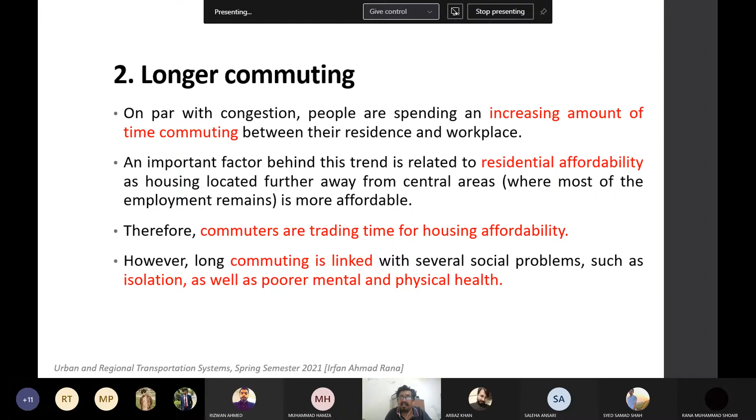But this commuting over large distances or time is problematic because of some problems, especially mental health and physical health issues that it causes.

As we discussed in the previous slides, you can see that average length of work trips has increased, and travel time has increased significantly, but average speeds have remained more or less the same. Commuting time also depends on the country, so this is another problem: longer commuting times.

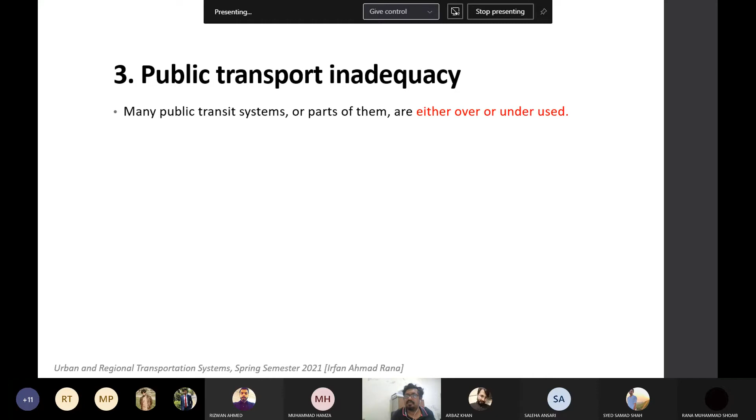Another very valid problem is inadequacy of public transportation. It's inadequate, it's not comfortable, so most of the time public transportation is overused or underused. That poses a problem itself, because in crowded settings it creates discomfort, and people will not opt to travel by public transportation, so the convenience of public transport decreases.

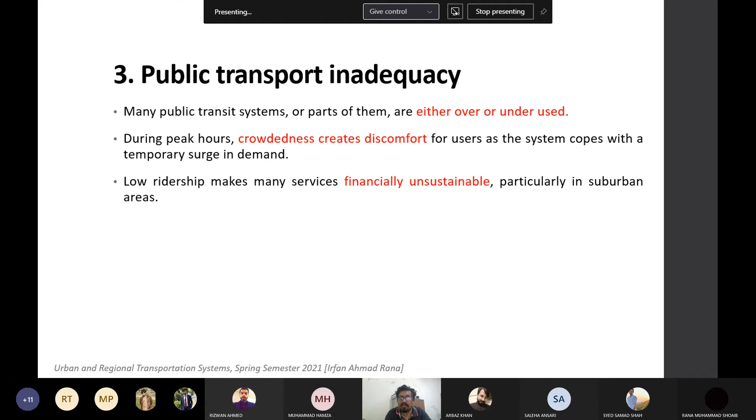People will say there's so much congestion, let's not use public transport, and sometimes due to low ridership, it becomes financially unsustainable. There has been a debate about how much public transportation should be subsidized by the country, or how it should be financed, maybe through tolls and taxes from cars, giving that to public transportation. So that has remained an issue as well.

This is especially an issue when your public transportation authority is different, your local development authority is different, your transportation department is different, and your provincial or national level, district level transportation authority is different. That also poses a problem in operation of public transportation, in how you cross-finance it.

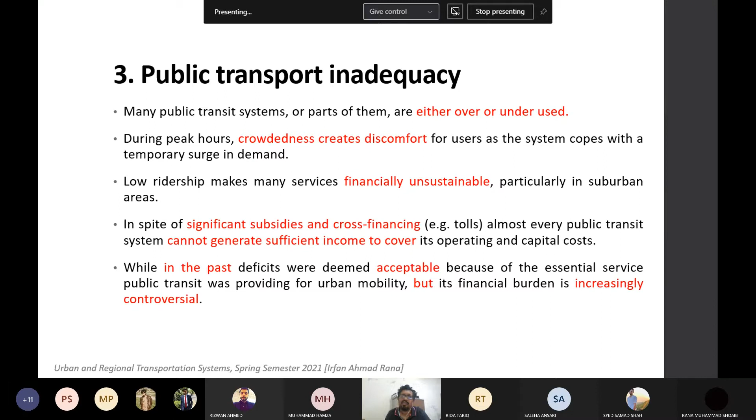In the past it was acceptable that the government would subsidize public transportation, but due to the changing economic structure in the world, it has become controversial whether public transportation should be subsidized by the government or not. So public transport inadequacy is right there.

Everyone knows that most of the cities in Pakistan, at least, are not pedestrian friendly. That also poses a problem for people who are encouraged to use bicycles and walking modes, so we need to emphasize this non-motorized form of transportation as well.

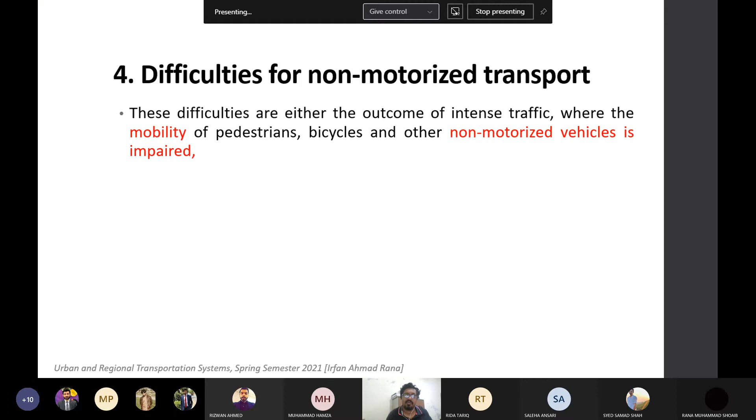Different cities in the world have prioritized non-motorized transportation modes. Then there's the issue that you are using a lot of road, using a lot of public land that might have been converted into public spaces. In Pakistan, we don't have so much public space, so that is another issue: good infrastructure and open spaces are being encroached upon by the transportation system, whether it's green space or area being developed for road infrastructure.

Then there is another issue, that in pedestrianized areas, if they prioritize non-motorized transportation systems, those kinds of systems would also promote a sense of community. Let me talk about the European context, where their old areas, or sometimes public squares, are fully pedestrianized, and they have become places for social gatherings, where people stay a lot, go for picnics or enjoyment.

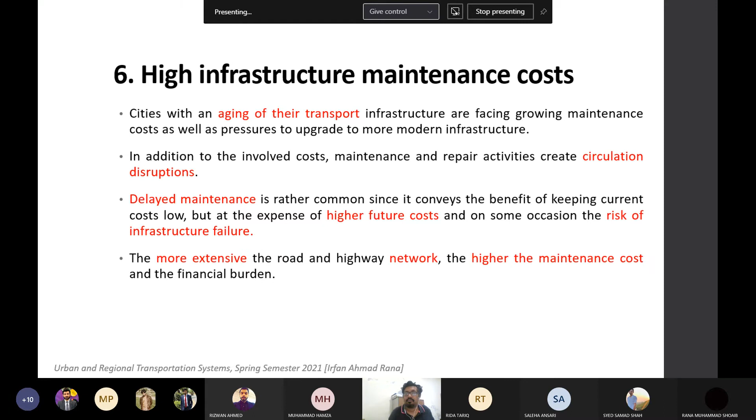Delayed maintenance would also be very bad, because it will damage your cars and limit your mobility as well. So again, maintenance, road maintenance.

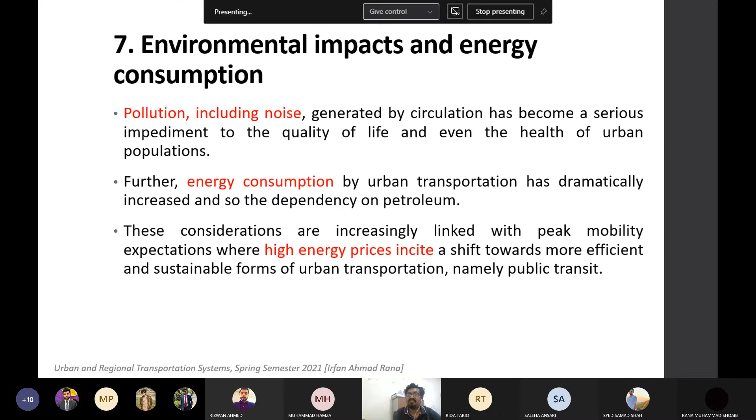Another issue is environmental impacts and energy consumption - how much cars contribute towards pollution, including noise. More cars on the road means more pollution. Of course, congestion and energy consumption are also highly correlated, and high energy prices will again have an effect on your transportation systems.

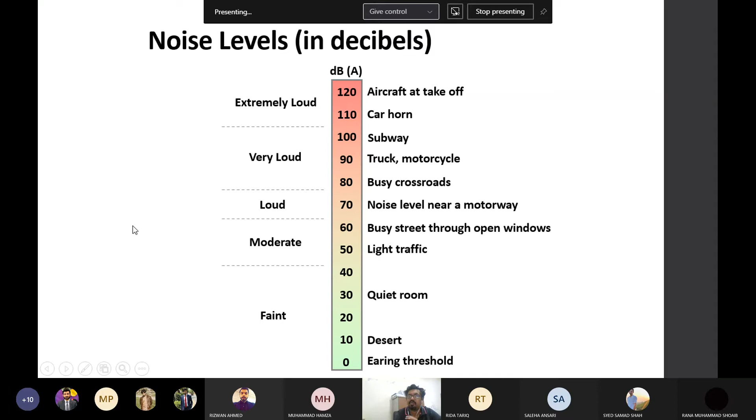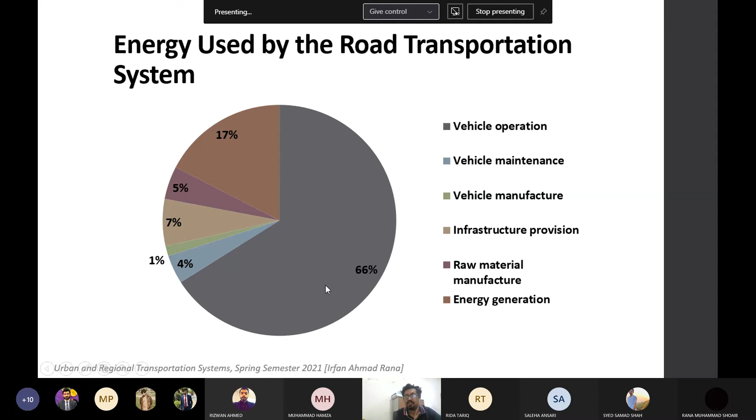With respect to energy use, the transportation sector uses 34% of the world's energy end uses. So how much energy does the transportation system use? 66% is being used by vehicle operations. This is the breakup of energy being used by transportation systems - a lot of energy is being used by it.

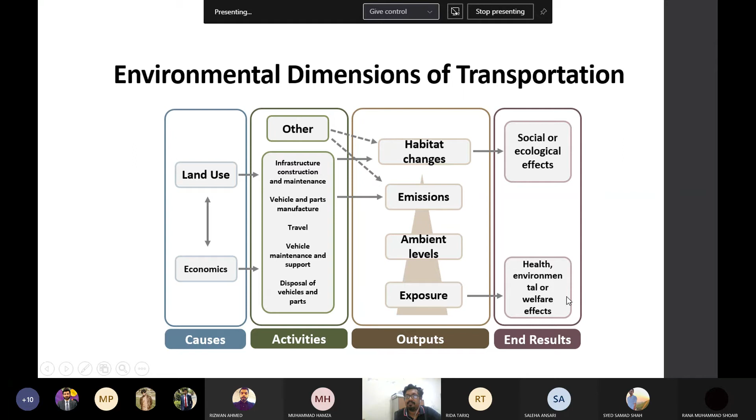Then there is a debate about which kind of system would be more efficient in utilizing energy. For a centralized system with high density development, emissions will be very localized and energy will be efficient. In a diffuse network in urban sprawl areas, there is high energy use, a lot of people will travel, and emissions would be diffused and spread out. So how transportation networks are designed would also ultimately impact your energy use and carbon emissions.

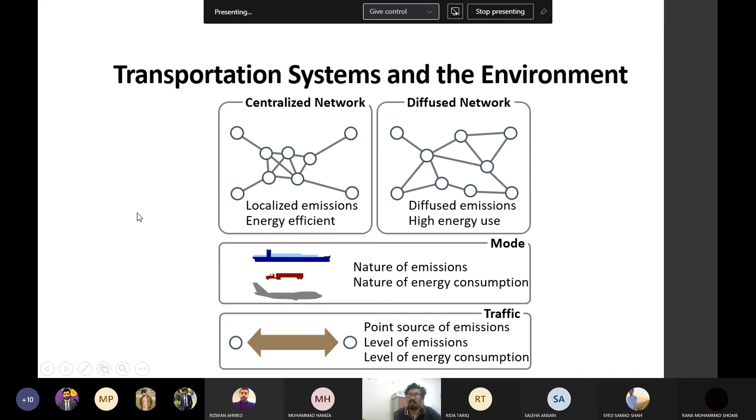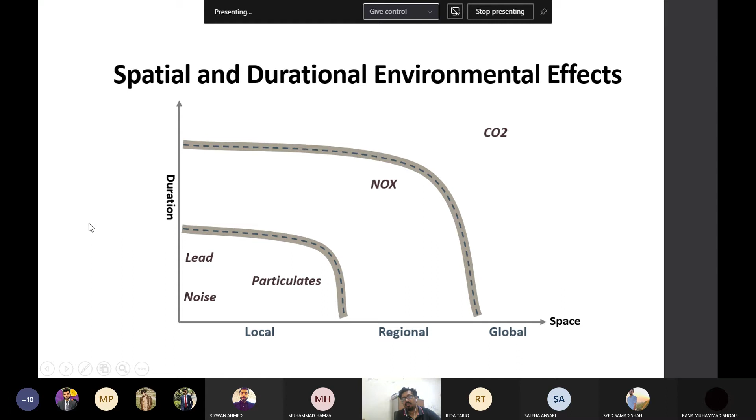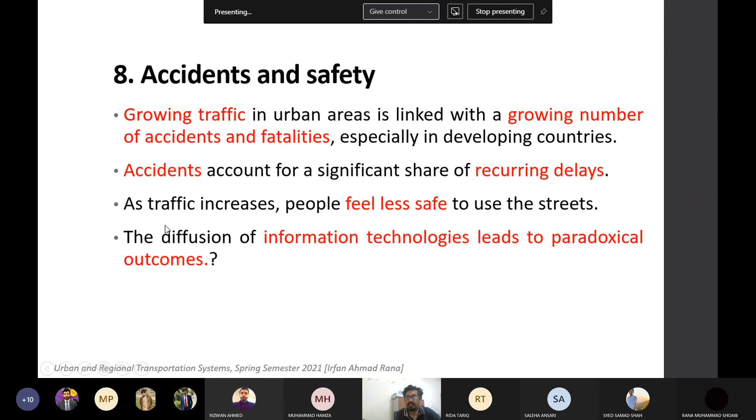I think the last point would be accidents and safety. Of course, the more cars on the road, the more accidents and fatalities on the road. Those accidents will cause congestion as well. Road safety is an issue - a lot of accidents happen on main highways.

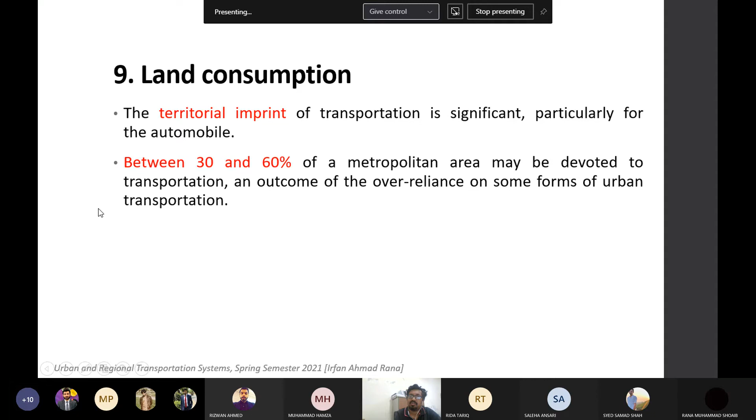Land consumption is linked to public spaces as well - we've talked about this previously in spatial urban form, that precious land is converted into road infrastructure, and 30 to 60% of areas are dedicated to the transportation system. This shows you how much land per area is available and how much is used by cars.

The last topic is freight distribution, which we have not talked about too much in our course - the logistics and distribution of freight movement in the city has posed a big problem, especially at the global level. A lot of freight is being moved all over the world, and products are being moved. Freight distribution has occurred, but we have not covered it, though it also severely impacts congestion in the country.

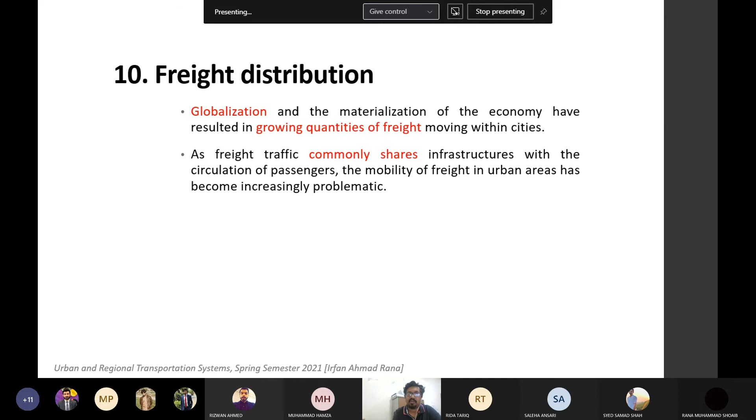So it also poses another issue: how much volume is being transferred? It will impact your road network, and the nature of what kind of thing you're moving - is it a cold thing, e-commerce, what type of thing is it? So it poses other problems - environmental issues, social issues, and policy issues.

So these are some of the problems commonly faced all over the world regarding urban transportation systems.

So in your opinion, what else could be the problem? These are some very generic problems. Of course, if we go into in-depth or critical studies about what type of mode is contributing to this type of traffic or transportation problem, there are many problems out there. But I've tried to summarize the very general problems. So do you have any other ideas about transportation systems in today's world, especially in the context of Pakistan? What other problems do you face? Anyone? Or do you think all of our problems have been covered?